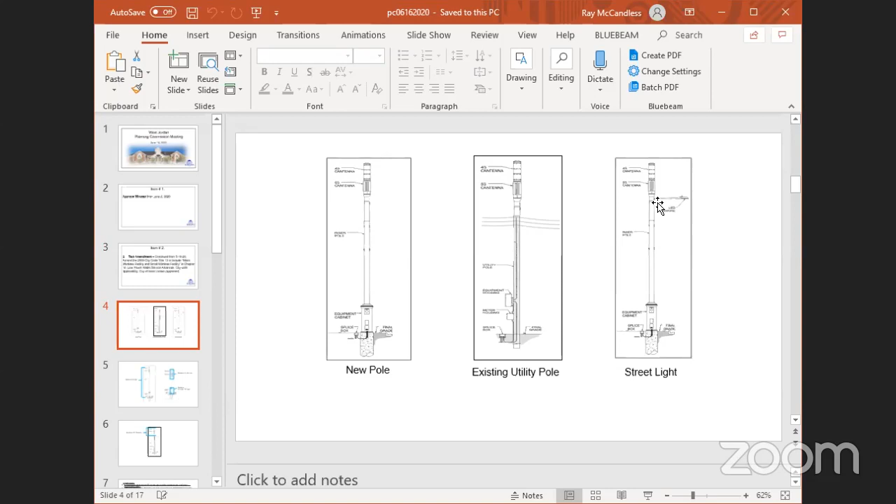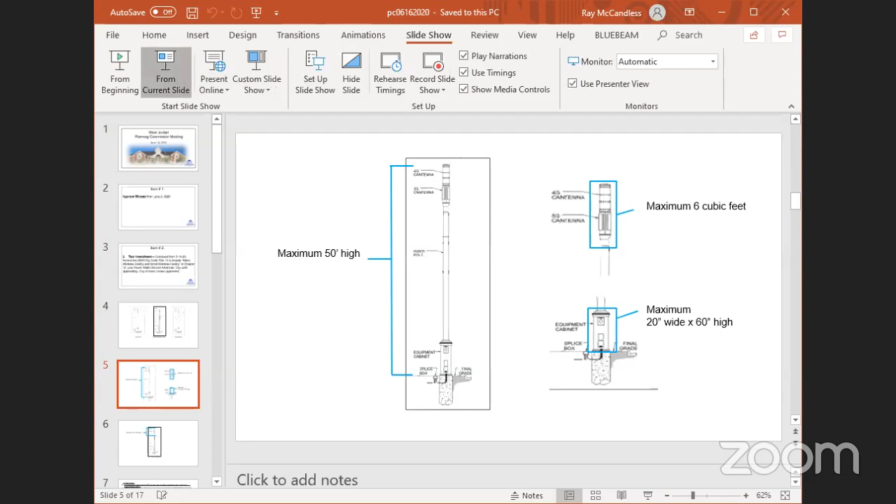Let me widen this out. So just a couple of things. The maximum height on a new pole is 50 feet high. The maximum antenna size would be 6 cubic feet, and then your maximum electrical equipment would be 20 inches wide by 60 inches high.

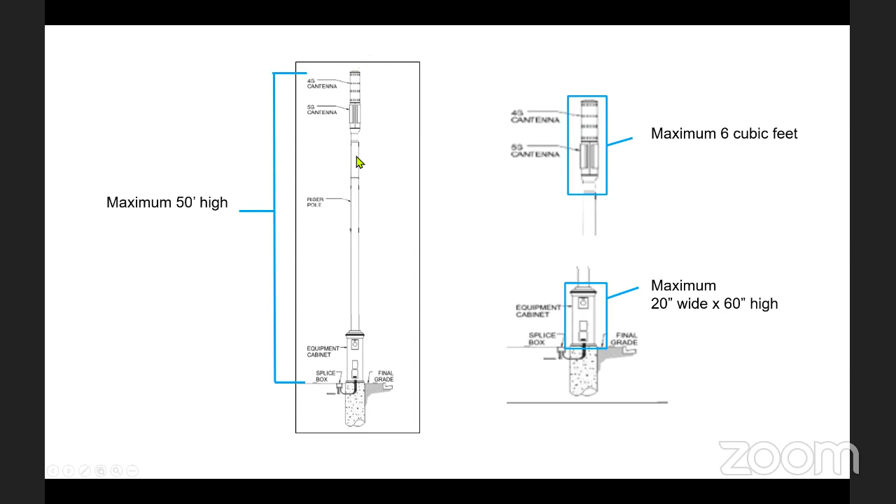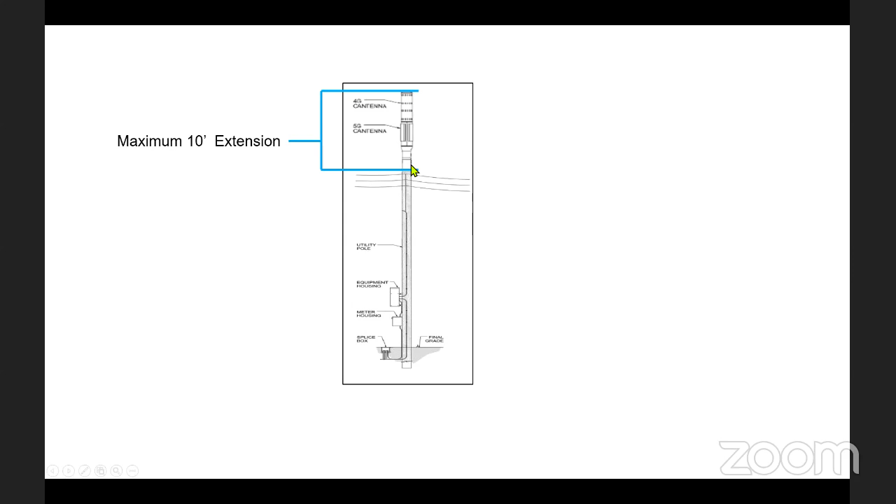See if I can move the screen. The other thing we talked about was a maximum extension on top of a pole of 10 feet, so they don't have something that is really tall or an extension that exceeds that 10 foot.

This right here is what we did is in the ordinance that we included in your packet. What I did is just highlighted the differences between the text that you originally saw on the 16th and then following the carriers, or the discussions with the carriers, what we added or changed. And we did get some other things that we did add at the request of one of the commissioners. This is just an example.

It says, unless otherwise allowed by the city in writing, the structure should not be located directly in front of any main building.

We also eliminated F, required clearances from any existing utility line shall be provided. And what we did is we just added that to H down here, that antennas and equipment attached to any existing utility pole shall maintain all safety clearance requirements.

And then we talked about the antenna enclosure shall not exceed 6 cubic feet.

The carriers requested that item G be removed, and this is up to you, commissioners, whether or not you think it needs to be kept in place, but their concern was that it was pretty ambiguous.

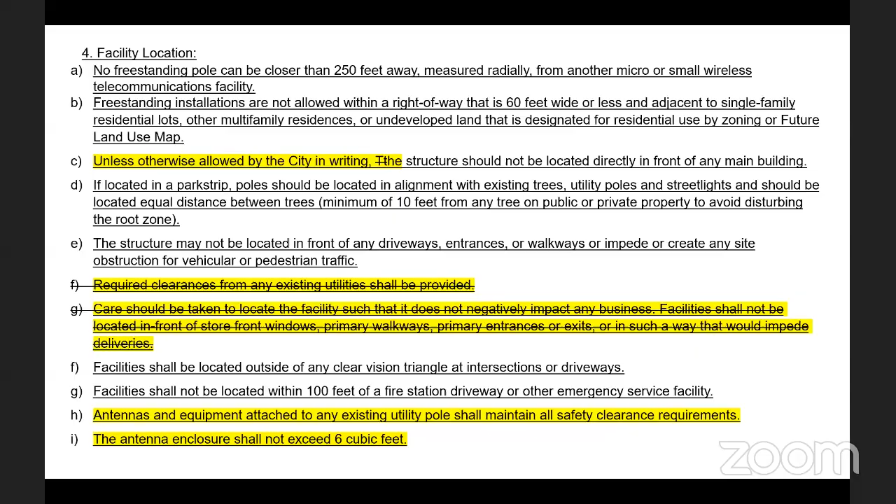Unless otherwise allowed by the city, all power lines, wires, and cables leading to facilities shall be undergrounded. The carriers were concerned that there may be cases where you've got an existing pole, for example, and they run those leads or electrical lines directly a short ways away from that, we can take a look at that. So it's just kind of an out. But generally speaking, I think we would expect that all the power lines be underground, just to avoid the clutter.

Number 9 is a section that was just taken out that I added because it was a state code requirement, and this is exactly what it says. It says an antenna of small wireless facilities may not extend more than 10 feet above the top of the utility pole that existed on or before September 1st, 2018. So they made that a date-specific requirement.

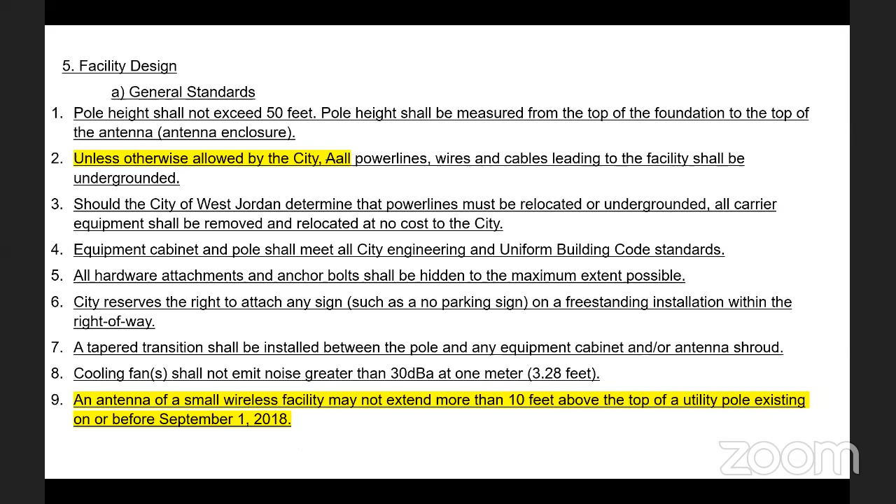These are the changes that we made to the new or replacement poles. When we talked the last time, we had recommended that the electrical equipment shroud not exceed 49 inches high by 19 inches wide by 13 inches deep. And the carrier said we just can't technically do that; we need something a little larger. So rather than 49 inches, we extended that up another 11 inches, so it's 60 inches high by 20 inches wide. That's basically 5 feet high by just shy of 2 feet. So it's not a huge difference between what we had initially proposed and what the carriers need to technically fit that equipment into that shroud.

On the antenna shroud, number 5 said the antenna shroud shall have a maximum 14-inch outer diameter and the maximum height shall be 10 feet. What we've changed it to now is the antenna shroud shall have a maximum 18-inch outer diameter and shall not exceed 6 cubic feet in volume, and the maximum height again shall be 10 feet. So we did increase that slightly to fit the carrier's technical needs.

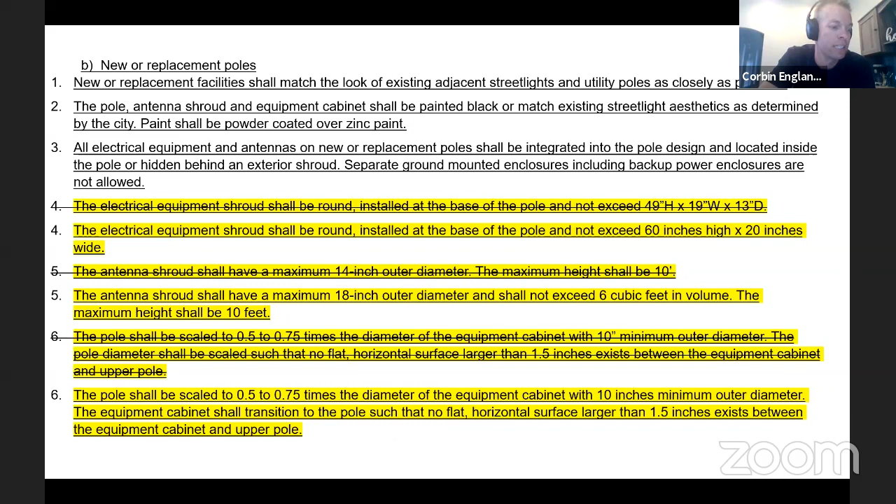I'll second. Excellent, we have a motion by Commissioner England, seconded by Commissioner Allen. Any discussion to the motion? Seeing none, all those in favor? Aye. Aye. Aye. Any opposed? All right, we are unanimous.

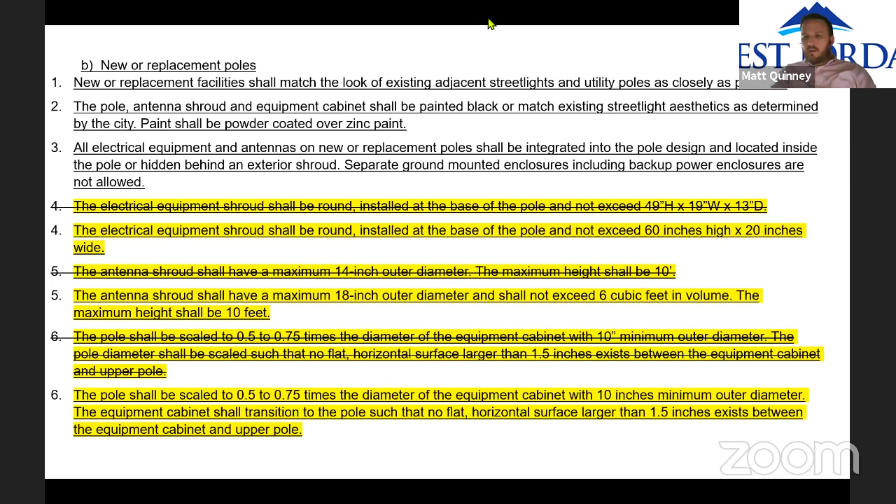Thank you. Moving right along, we've got our first public hearing, which is Big O Tires, 7761 South 3200 West, a preliminary site plan and conditional use permit in an SC2 zone. KEC Properties, Kory Coleman is our applicant. Let me see, I can't remember if I saw.

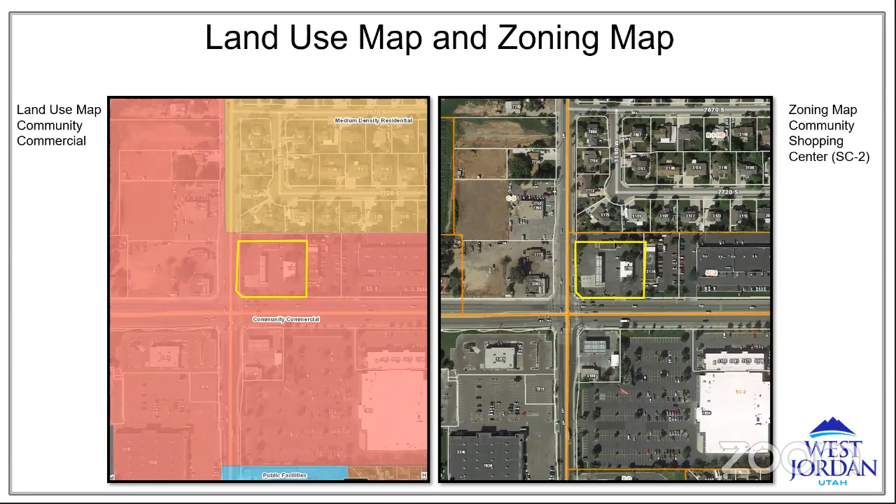So that's the east side of the building, as you're driving west down 78th, you're going to see the back of the building. Yes, okay, so they did add that for DRC comments. And that is about all that we have.

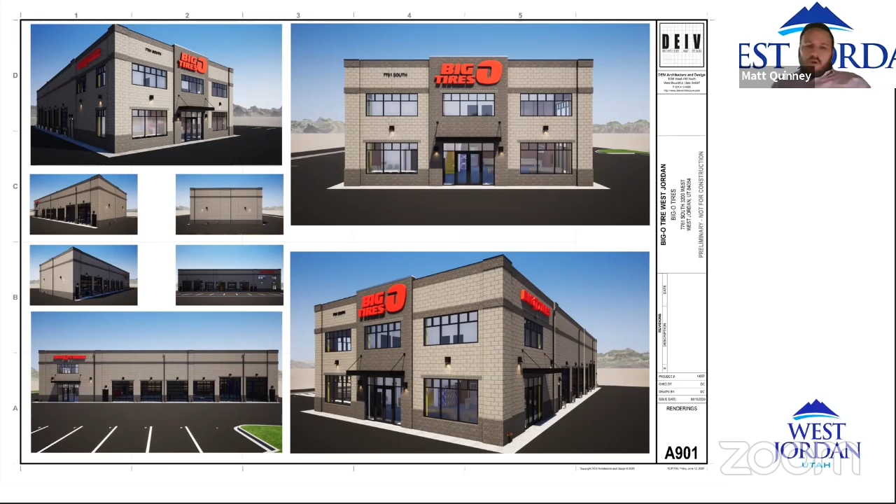I've got just one other quick question, and I may have just missed this being distracted - what's happening with the existing facility? We'll continue to use that for overflow. Okay, so you'll own both buildings? Correct. Okay, excellent. Any other questions for staff or for the applicant?

Okay, seeing none, we'll go ahead and open the public hearing portion of this item. If anybody is here to speak on this item specifically, please just give me a little raised hand on your profile there, and I'll give you permission to talk. Okay, I don't see any, so we'll close the public hearing for this item and bring it back to the Planning Commission for any additional discussion or possible motion.

I'll make a motion. Please do. I move the Planning Commission approve the preliminary site plan and conditional use permit for Big O Tires located at 7761 South, 3200 West, in the SC2 Community Shopping Center, critical zone of South Valley Regional Airport, zone district, subject to conditions 1 through 5.

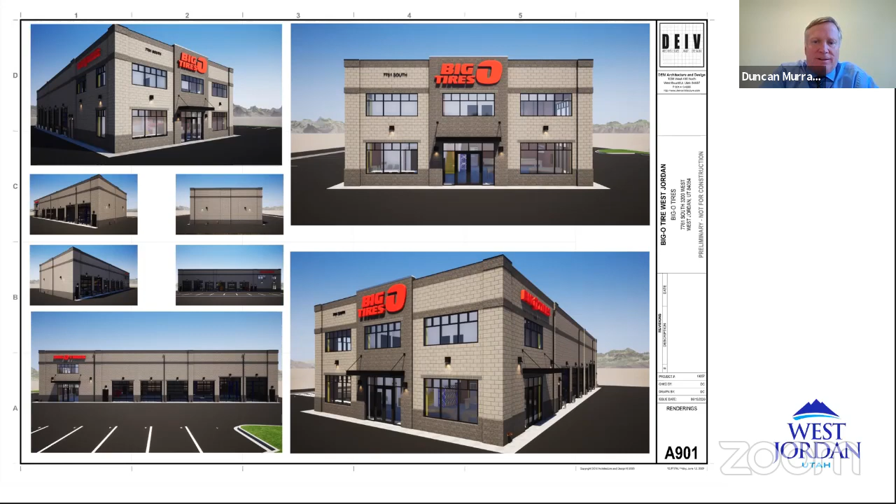Okay, perfect. I need new glasses. I have to move everything like three feet away from me so I can see it. It's all right, I feel your pain.

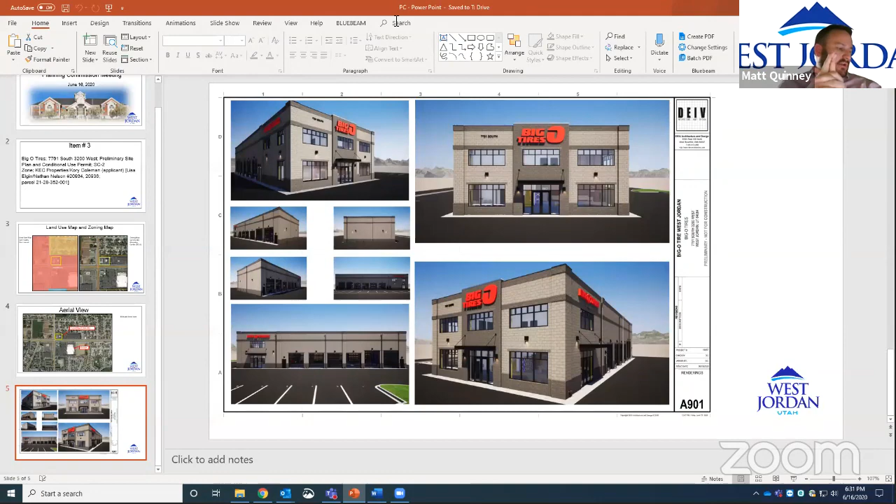This brings us to our next item, which is Moonbeam Auto Sales / the Used Car Factory, 8261 South Redwood Road, conditional use permit for motor vehicle sales and service in a CG zone. Harrison Cleland is the applicant, and I did see Mr. Cleland on our list of attendees. So it looks like you are free to speak, sir.

How's it going? There you are. Good. The floor is yours, sir. So my name's Harrison, applying for our business in West Jordan. It would just be for the repair and sales of used passenger vehicles.

Is there anything else that would really need to be known? This time is for you to tell us whatever you think we need to know in order to gain our approval on your application. So if you feel like that's good, we'll let Mr. Forsyth give us the rest of the story. Okay.

Any questions for the applicant? I just have one: when he says repair, there's limited repair and general repair, I can't remember the exact verbiage on the zoning. What types of repairs will you be doing on vehicles there? So yeah, I had seen that as well with the zoning before. We wouldn't be getting into anything major, more just basic maintenance stuff - if we have to get tires or brakes put on the car, oil changes, fluid exchanges, stuff like that. All right, thank you. Yep.

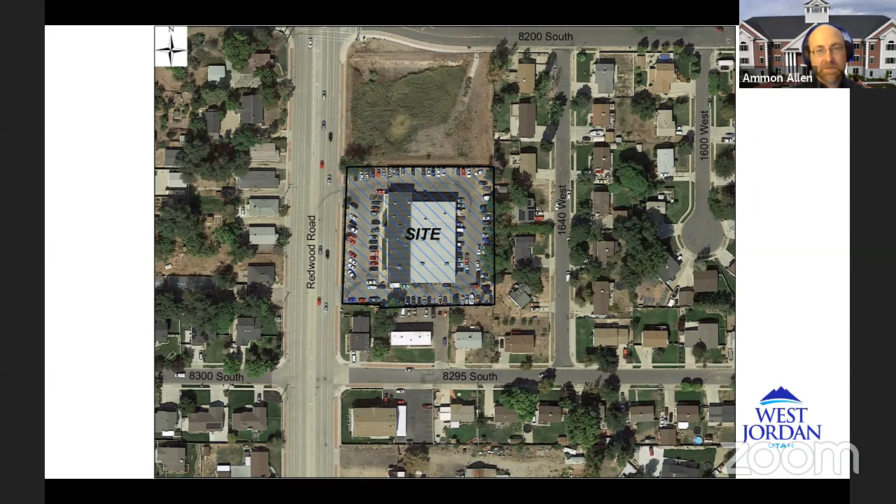Any other questions? As long as we're talking about repairs, sorry Commissioner - I understand this is a site that's being converted from a previous use. Is everything in place for the proper disposal of oil and other fluids? Yes, we had actually moved to this location after being in our previous location for just over 4 years, and with that we had that same service come in. It's called Emerald Oil Services. So they're the guys who take all of our used antifreeze, used oil, all the other hazardous waste that we would have, and it's cleaned up as best as it can be.

That it, Ammon? For now, yeah. Okay, just making sure - I thought I saw your mouth moving again as you were turning away, so just making sure. All right, any other questions for the applicant? Mr. Forsyth, this one's yours.

Thank you, Chairman. I'll fill in some more of the details. This site is located just off of Redwood Road, south of the 8200 South traffic signal. To the east you've got a single family residential neighborhood. To the south, couple single family residential properties and a sixplex apartment building. To the north is a UDOT detention basin, and to the west is Redwood Road.

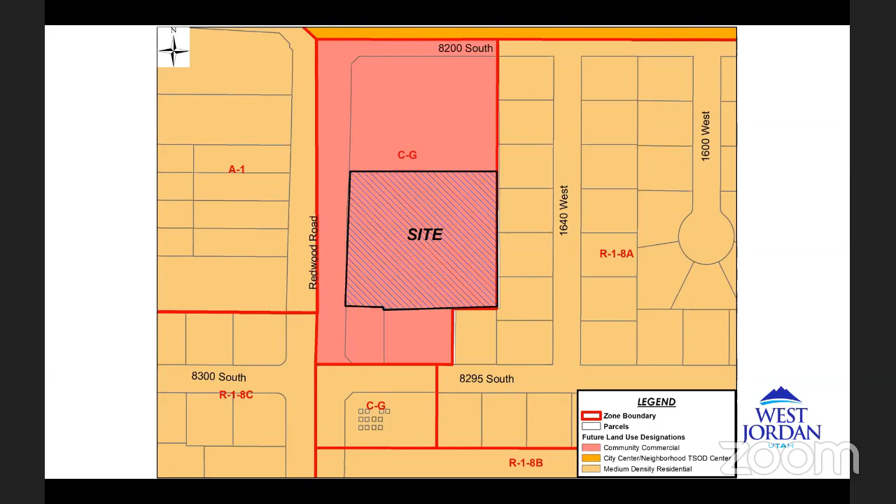So the way this is set up, basically you've got just one other business located here, which is True Green. They're a landscaping maintenance company. And so Moonbeam Auto Sales and the used car factory are going to take over the space previously occupied by Premier Vehicle Repair. You can kind of see here on the map, they've got a small office that'll be used for most of their sales, transactions, and reception area. And they've got a large repair shop, basically exactly the same as what was used by Premier.

That'll be used mostly to just get the cars ready and do minor repairs so that they're in good running shape and available for sale. And so then they've got an outdoor vehicle storage area that's mostly going to be used for either cars that are in for repairs or excess inventory if they have any.

We're probably anticipating some vehicle display out on Redwood Road. The site's set up pretty well for that. They've got quite a few parking spaces there, as you can see, and then most of the parking spaces adjacent to the building can be used for customers. So that setup should work quite well.

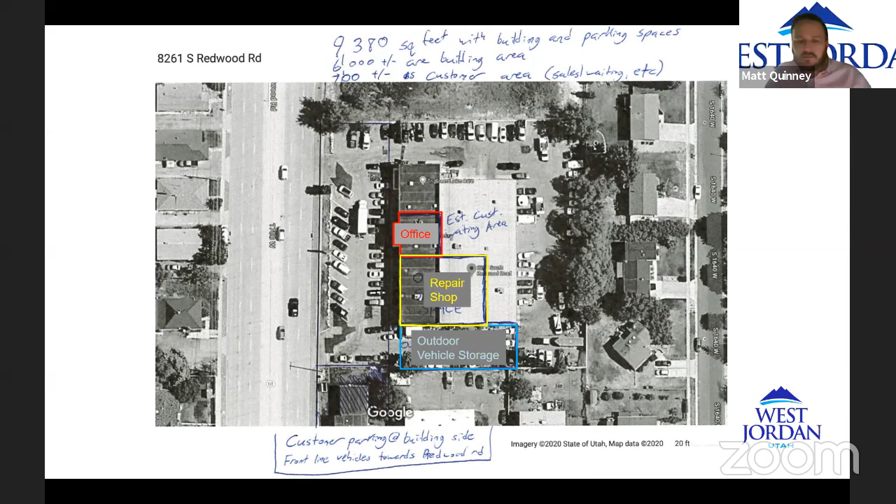Any other discussion to the motion? Okay, all those in favor? Aye. Aye. Any opposed? Excellent. Thanks guys for hanging in.

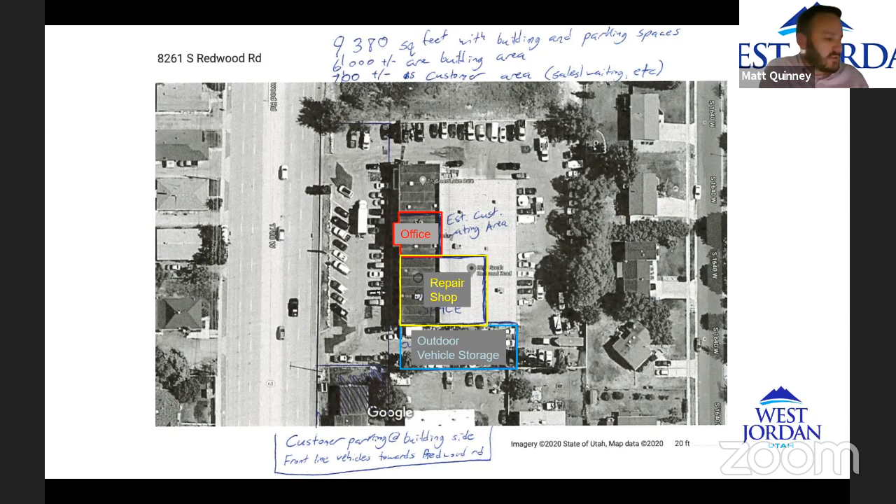West Jordan, we appreciate you guys coming in. Well, thank you. This brings us to our last item, which just needs to be continued until our next meeting.

So if anybody wants to make a motion to do that. I'll make a motion to postpone or continue this to the July 7th meeting. That is the Oak View Industrial Park MJ Project 1 subdivision. Thank you.

Second, seconded by Commissioner Allen. Any discussion to the motion? All those in favor? Aye. Aye. Any opposed?

Can I ask a question? How much longer are we doing virtual meetings? Is there a plan in place that we get to go back to City Hall? Well, guess what, we have the mayor on here, so I just unmuted him and let him chat if he wants to.

We actually talked about that earlier today, and the council is planning on going and starting to meet in person in July. When do you guys want to start moving? We're setting up the area for the audience to keep our 6-foot distancing away. The problem we have is on the dais, keeping you 6 feet away up there. But we're still going to try and make it work.